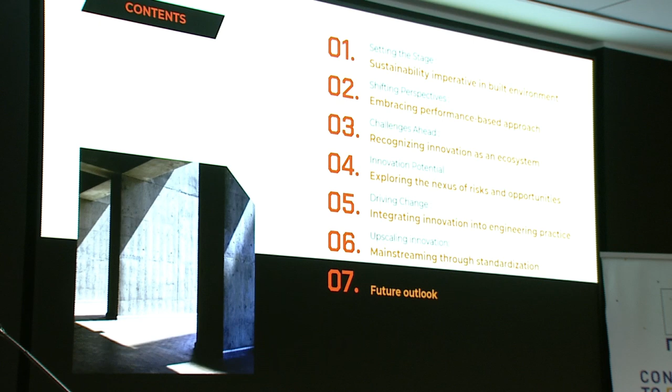I want to tell you something about a number of topics that are a kind of stepping stone in creating solutions. Part of that will be innovation, and a large part of that will be communication—how we talk with each other, do we understand each other, and are we going in the same direction. And in the end, how can we amplify the impact of what we are doing? What is the role of standardization, in particular in mainstreaming and upscaling the things that we are doing, because only by upscaling can we really make a change.

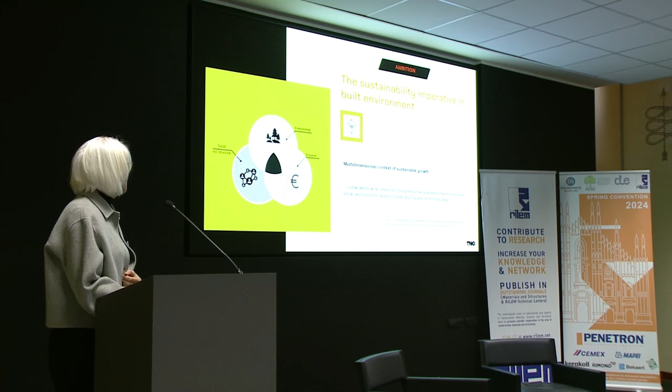Well, sustainability—everybody knows, but let's repeat it once again. It's about sustainable development, about something that we can continue to do over the years to come. It means that we need to look from a broader perspective. The economic perspective is also a very important one. We can have perfect solutions, but if we cannot afford to implement them, it's just impossible to succeed. And there is also this aspect of societal needs.

Societal well-being is more than environmental impact only. There is security, there are needs for aesthetics. There are a lot of things, and built environment is an example where we cannot forget this. So this multidimensionality is important.

And that's why I mentioned it in the beginning already—as Liberato said, International Federation for Structural Concrete represents largely designers and those who will construct and maintain the structures. So for us, it's about taking care of multiple aspects of the requirements, which is compulsory for performing our job.

Well, we have been hearing about sustainability for actually not such a long time—1987 is when it all started. And if I had been preparing this slide 2 days ago, I would need to add one more: 2024. Yesterday, the European Court for Human Rights ruled that having an adequate policy for controlling climate impact is a basic human right. This will change policy, and will probably influence policy worldwide, although it only happened on the European scale. It means the attention is increasing.

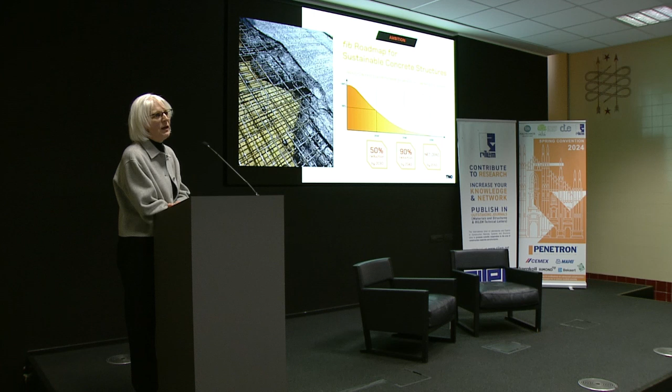2050, it's already in a few years. We don't have time to waste. And that's the reason why a number of organizations and communities establish roadmaps.

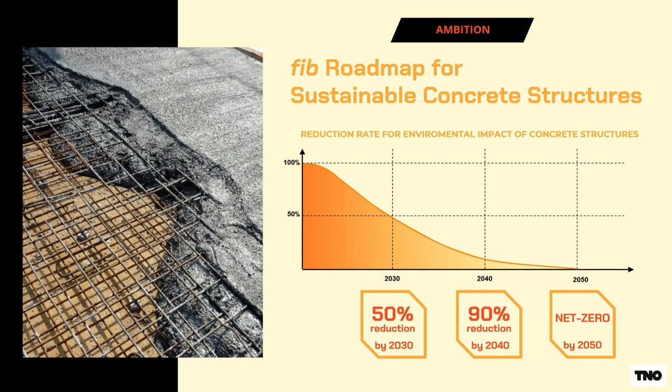This is one of the examples that the International Federation of Structural Concrete have developed: targets for reducing environmental impact in the concrete construction sector. I'm talking about structural concrete. This is just a representation of our ambition: 50% reduction by 2030, 90% reduction, down to 10%, by 2040, and net zero by 2050, total, over the total life cycle.

When you discriminate that into the part attributed to the cycle, part A, which is production and manufacturing, you see that our ambition is much more demanding. By 2040, we should become net zero over the part of the A cycle.

Now, this slide I also want to use for some other purpose. Quite often we think that that's all, stage A. When we do it, then we are done, yes? Then we did good. Well, although this is just a schematization and representation, there are also other stages that generate environmental impact.

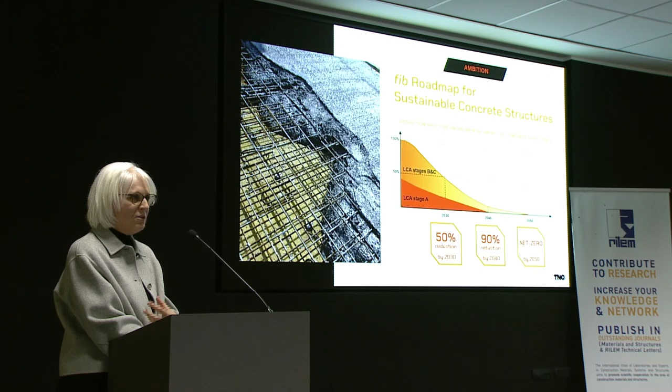This is largely based on the scale of the infrastructure assets, bridges, viaducts, tunnels, in which under environmental impact in stage B and C, we can also count indirect environmental impact due to traffic restrictions and hindrance, and impact caused by the need for rerouting transport, particularly in urban areas. This will be large. For buildings it can be different, but nevertheless there is also that part of the need for improvement that we should not neglect.

Well, is it feasible? Sometimes it's good to really be realistic, yes? We can set great targets but never get there. But who will check that in 2050? I will be retired by then. But this seems really to be realistic. Very simple calculation.

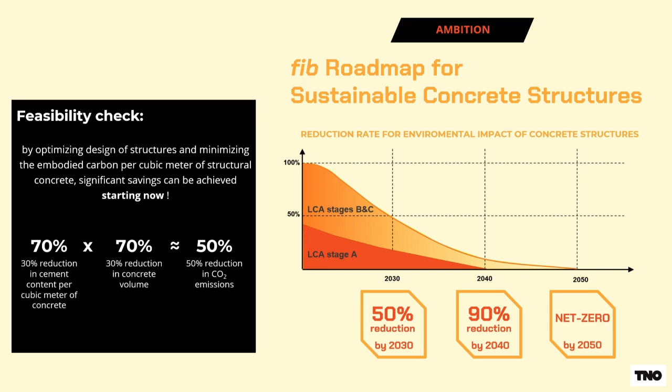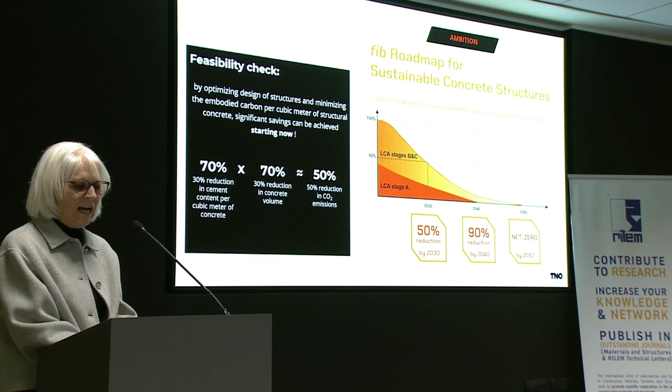What we now do in concrete structures can be improved very fast if we are only able to reduce cement content in a cubic meter of concrete, and we know that cement is one of the factors that very much determines the carbon footprint of concrete, by 30%. And we can optimize our design, which is at this moment, in general, in routine projects, very conservative, and we over-design our structure. Then we can already get to 50% of the CO2 emission. It's really not much.

We are not talking about zero carbon or low carbon concrete to the extreme that many of you are working on. We are just talking about something that we could do. And think about that - a lot of concrete is being used in structures that are actually not very demanding in terms of performance requirements.

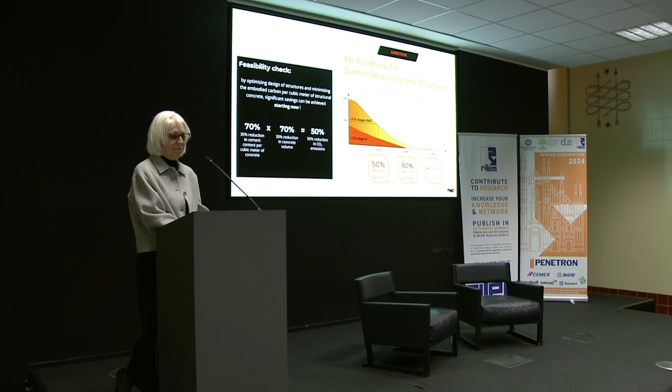So let's work where we can work immediately. Let's try to do that already now and go towards 2030, 2040, 2050 with the large ambitions, because we actually should be able to do it.

Now, what are the tools, what are the means, what are the approaches that structural engineers, with all the partners involved in that project, have at their disposal? We can do a lot, as we already said, in that before-use stage A: material production, material and construction process. Reducing environmental impact there is compulsory, and that's evident.

What we can also do is design and construct to facilitate circular use of the current waste streams. This is also something we can already mobilize in that stage A. So not only carbon neutrality, but also circularity. You have seen these policy targets - circularity is also important, probably just as important as using materials optimally.

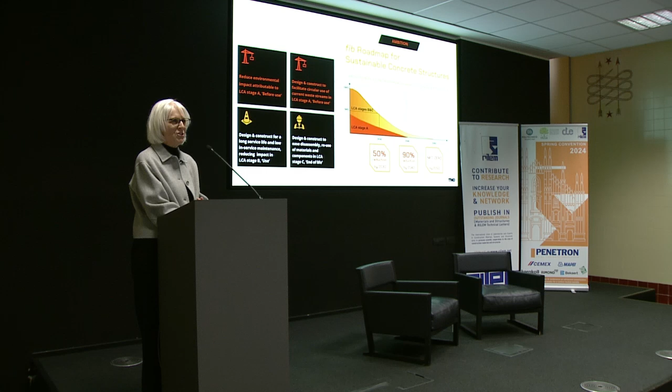In the long run, we don't want to use that. I was last year at a conference in Australia, which opened with a great statement from the native owners of the land saying: use what you need, don't use more. I think it's great. We should use what we need, and we should try to use it in the most optimal way.

Now, going into stage B, the stage of use, we deal with the built environment in which a lot of assets already exist. Of course, it is different throughout the world. In the north, we have actually already constructed a lot of the assets, both buildings and infrastructure. In the south, we are still in this trend of increasing the volume of assets.

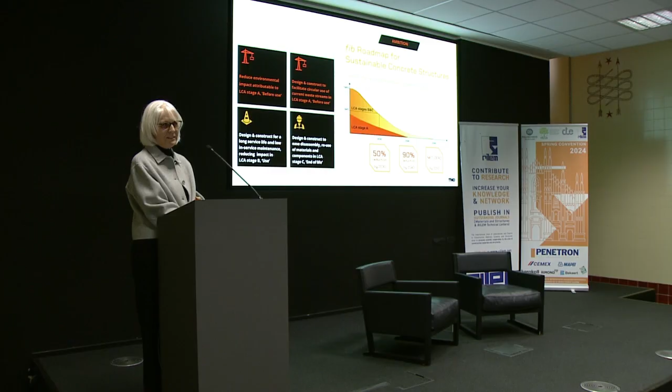So this is not generic, but anyway, there is a huge opportunity in improving the way we use our structures and designing for long service life, designing for low in-service maintenance, significantly reducing the impact of stage B. And we can do it both when we design new structures, but we can also do it in case of existing structures by improving our approaches to conservation and use of the structures.

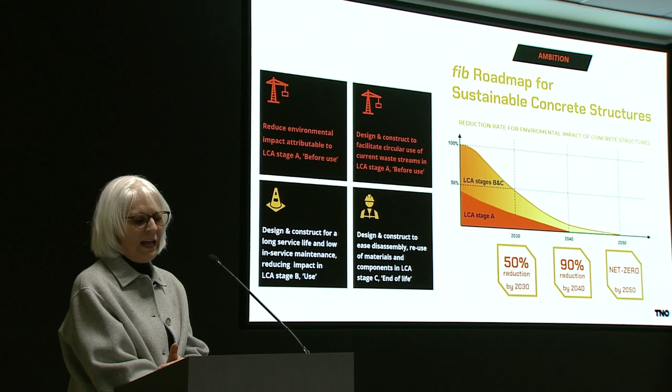And end of life, again, is a stage of which we can think, and we can discriminate it into two situations: design for reuse, and sensible end of life. So how do we build new structures so that we can reuse them, or at least we know what we are going to do at the end of service life?

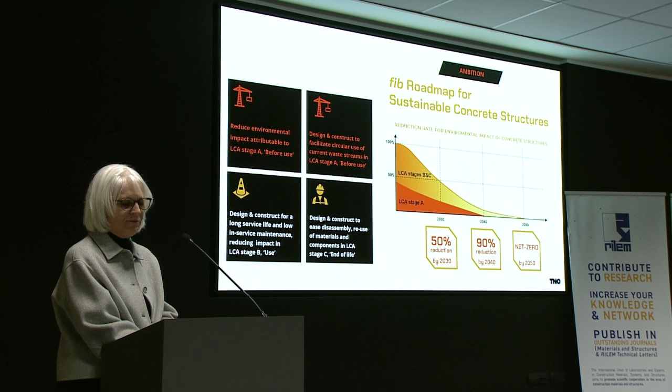Just to go back to your talk, this is thinking ahead. And another situation is, what do we do with the structures that already exist, and how will we think before we decide to decommission this, and what will we do with the materials that come free after the end of life. With that roadmap, fib comes with a few stepping stones for creating the solution.

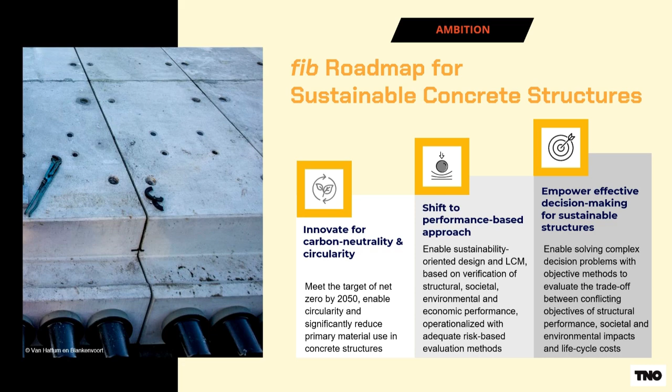The first one, evident, is innovation for carbon neutrality and circularity. We have to have these technologies, yes? I mean, this is compulsory. We cannot keep talking. We have to be able to implement new solutions, because the existing solutions definitely have their limitations. Maybe we will get to this 50%, but we want to get carbon neutral, so we need more.

The second one is to go into performance-based approaches. The current specification-based approaches have such strong limitations that they will not enable designers to work; they constrain them in too many ways. I will soon talk more about what performance-based means, because I think here we need to establish a common language. This is essential to understand as our new way of looking into the objectives of design and evaluation of performance, doing it across all domains of sustainability - structural, societal, environmental, and economic performance - and thinking about the risks involved in our asset structures.

I mean, risk is something that we deal with. It's nothing new. It's not that new solutions have risks - everything has risk, everything that people make has a chance of going wrong. And we know how to handle it. Let's embrace it and evaluate it when we are talking about innovations and improvement.

And now we are in Milan, ahead of the design week, and everybody thinks design is creativity. Well, so is engineering. Engineering is also creativity - it's an art of decision making. So we need to help people take decisions based on good arguments. This is also one very essential part of the holistic view on sustainability.

We are taking decisions that sometimes involve trade-offs, sometimes involve compromising economy versus environment. Sustainability, as I said in the beginning, is being able to endure for years. Resources are limited - human resources are limited, financial resources are limited. How can we upscale without considering these kinds of situations, in which the evaluation will involve trade-offs, or at least will involve discussions about trade-offs, in which we want to be transparent?

Now, as I said just before, performance-based approach is a must. We all complain about the limitations of current standards that are specification-based, that prescribe how to make things, that limit the freedom of material producers, designers, contractors, and in the end deliver something that is not exactly what the owners intended to get.

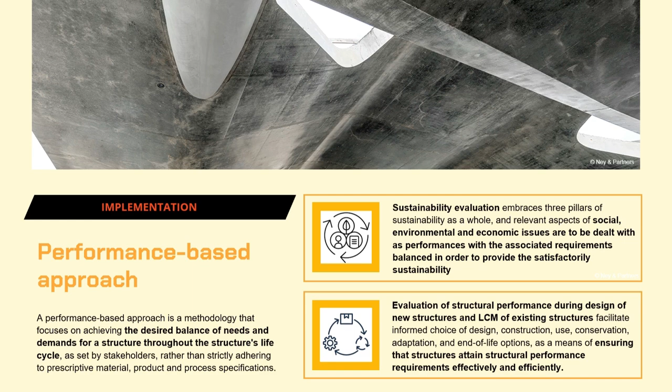Well, why did I mention owners and customers? Because these are the ones who know what they must have. They are the ones who set the demands. They are the ones who can articulate their needs, and we have to understand them. There will be a lot of talking about understanding in this presentation, because this is exactly what I think sometimes goes wrong - we don't really listen to each other. We try to sell our solutions without sometimes understanding whether they fit.

And now these performance-based needs and requirements can be established on the level of people, profit, planet - so overall sustainability - but also in particular on the level of structural performance. And since this is close to my background, probably a part of this talk will be about that structural performance and evaluation.

What do we do when we actually look at the process of creating building assets in general and concrete assets in particular? When we really want to apply a performance-based approach, we need to start from the beginning, from recognizing who are actually the players and what kind of role they play in that system.

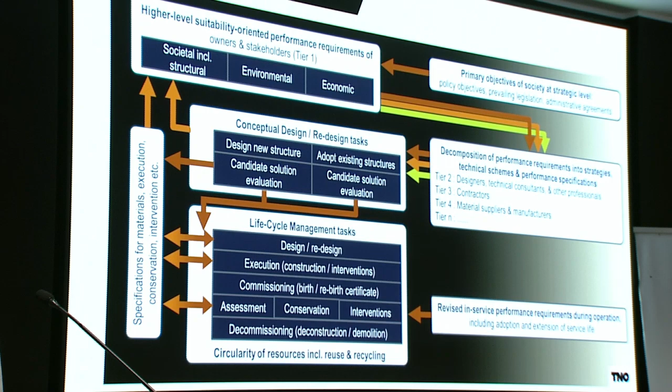The first layer of these requirements comes from policies, from legislation. There are demands that society has already decided - we accept certain levels of human safety, so we accept certain risks. We demand certain levels of operational safety for our assets. Quite often they are set by law - we cannot neglect them, we must know them, we must understand that. A lot of what is put in the Eurocodes is already performance-based.

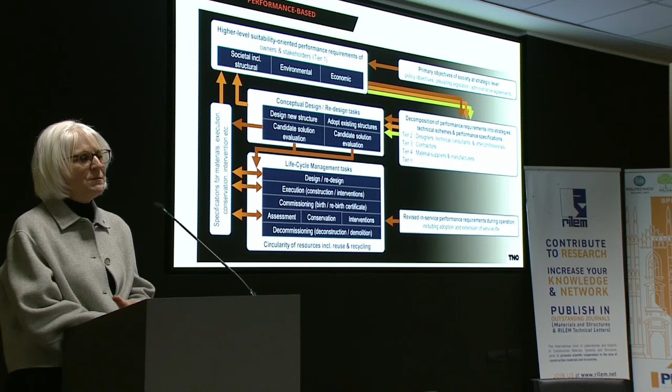These high-level performance requirements need to be decomposed and translated into requirements that are actually technical and relevant for the process of design and engineering. There is, in that scheme, one very important stage - the conceptual design stage, or redesign stage in case of existing structures. This is where the whole process starts, the beginning of the whole creativity.

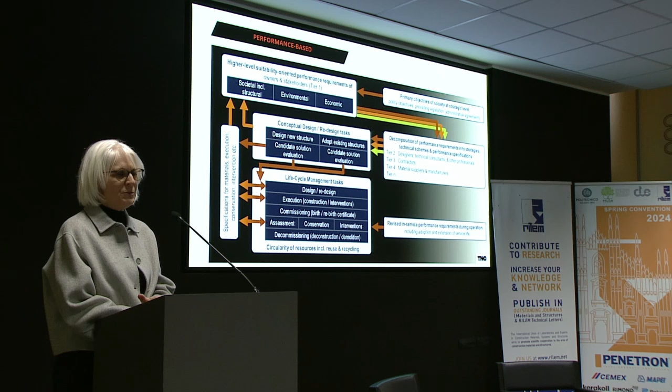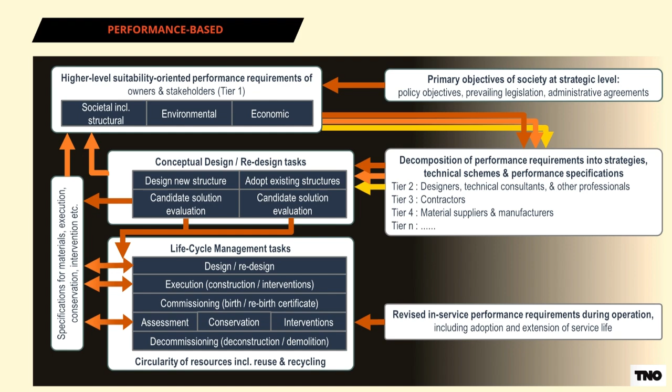This is the moment in which it's so important to engage, especially when we talk about innovation, with the players who may have their opinions, their solutions, their ways of handling things. Designers, contractors, material suppliers and others - all of them can and should participate in the decomposition of these performance requirements, to create the full set of requirements that we can then evaluate, validate, improve, and so on.

Well, what does it mean? Innovation thrives on effective communication. If we forget that step, then we will start again to specify, because this will be this directive way of communication - please provide me with the material, here you have material with the strength, do something with it, now here you have a structure, deal with it. That's not the way we can communicate with each other.

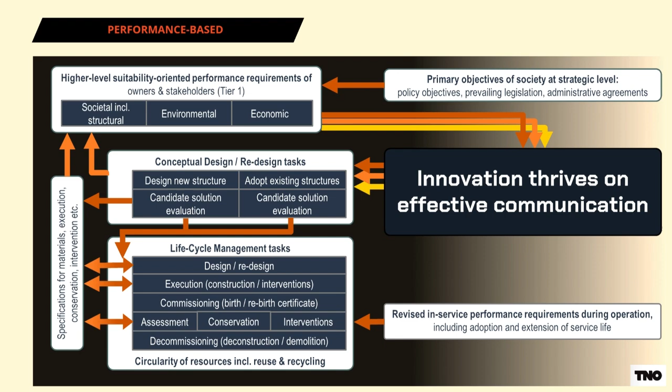So that's a very important part of performance-based design - communicate when you establish your requirements, because this will become the basis for everything that happens later on. The conceptual design stage is the moment when you do it. And for existing structures, this is the stage in which we conceptualize the beginning of our assessment and the beginning of taking a structure into life cycle management process.

And of course, requirements can be revised during the service life, so it's also important to stay flexible and stay alert, because things change in time and we should not forget that.

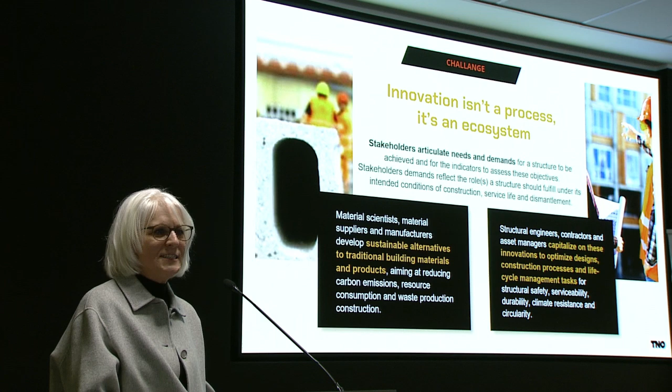Which brings me to one of the important statements. When I was thinking about this keynote, I was thinking, what actually do I want to say? And I think this is probably the most important: innovation is not a process - it's an ecosystem. You need to innovate together, and only then can you succeed in making your innovation relevant, because then there is something who wants to receive it, there is something who wants to provide it, there is somebody who wants to make it.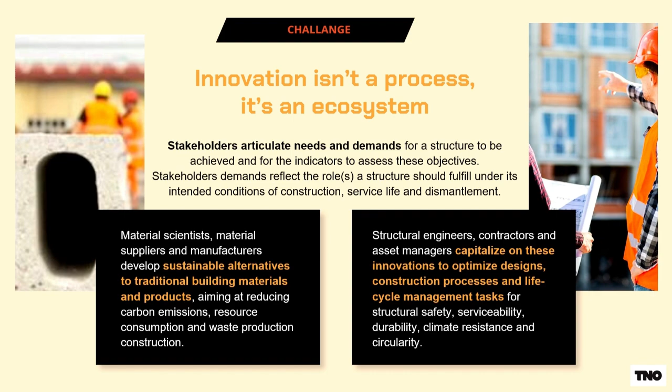So as you see, while we are sitting here together, people from the material angle, people from the structural angle, we need to understand that we can only use these sustainable alternatives and capitalize on them if we understand what we actually need. Now this will be a kind of attempt to establish a common language. Maybe it's too technical for the keynote, but nevertheless, I thought I need it.

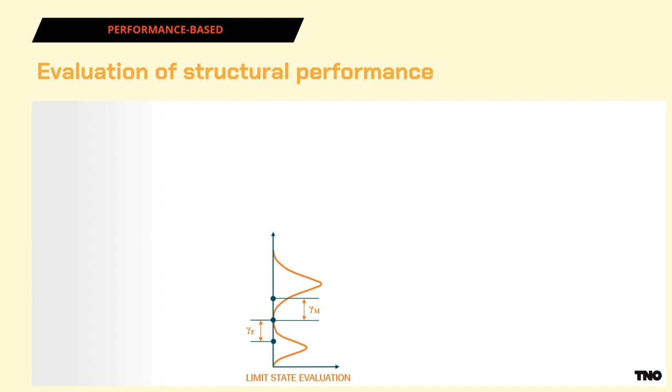What do we do - and this is more generic than concrete structures only, this can be generalized beyond the limit state evaluation and limit state design concepts. What we actually want to prove by evaluating structural performance is that our resistance is larger than our demands on the resistance. That can be mechanical resistance, durability, or any other type of performance.

I come from that part because many of you do research on material. What do we do? We try to understand how that resistance part is being established, and we simulate what reality is. We use models - they can be models based on empirics, but we just model reality. What we have here are models of materials, and models of materials provide a distribution of their properties, but they are bound with certain uncertainty.

These are just models, schematizations, and then we use that as an input in resistance models, because we are talking about structures, so it's not the material that is providing the full resistance. No, materials contribute to provide the resistance of the structural system. So again, we use another type of model to which the material model is an input to establish or approximate the resistance of our system.

And the structural resistance models, again, have their uncertainty. And all these uncertainties together, I think, contribute to having this gamma m, this partial factor for material. So it's not only material. There is also this model uncertainty on structural resistance. And so uncertainty of material model, uncertainty of resistance model, we need to know them.

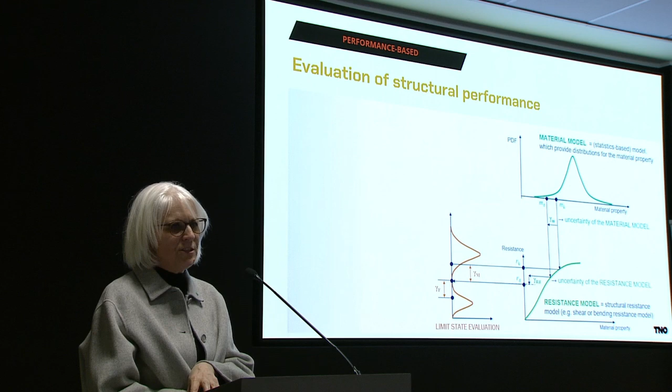Once we know them, then we can work with it. That's also the beauty of modeling. Yes, it's so transparent. We only need to have that understanding and this information to be able to proceed. It becomes important when things start to change, because this is nothing new. I mean, this is what we already do for normal traditional solutions.

But when we go into new materials, then maybe uncertainty of the material model changes. Maybe the model changes, actually. And the same goes with the resistance models. Are we sure that the same resistance model that we have been using for traditional concrete is still valid for the new type of material, where maybe new mechanisms start to play a role, maybe fracture mechanics becomes different, maybe interaction between reinforcement and steel reinforcing material and concrete is different, maybe ductility is different and starts to play a role. So how good are our models?

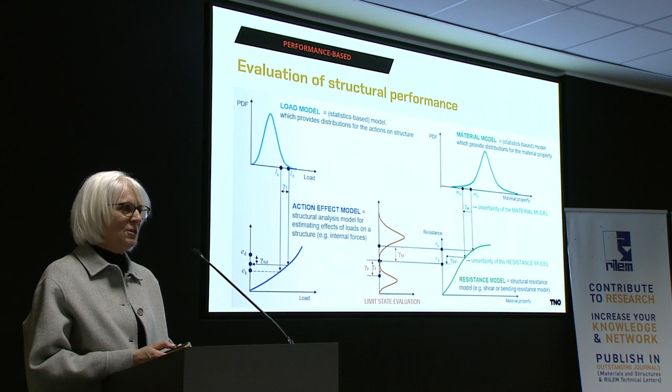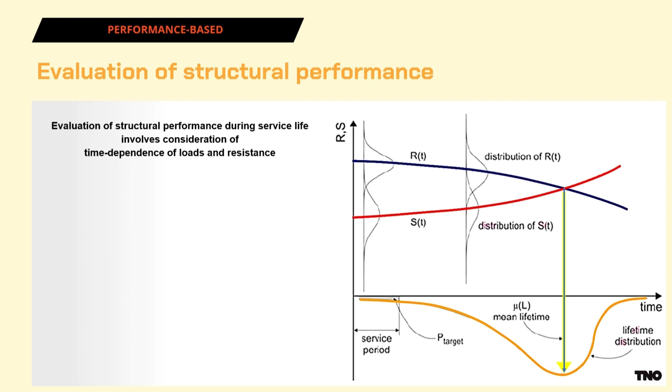Well, actually the same happens on the side of the loads. Less relevant? I don't really know, because when we do design, we have to anticipate the change in the loads over the life cycle. We don't design for today, we design for the period over which we want to provide that performance. So service period is important, which means that we have to understand how the properties of our resistance will start to change, how the resistance will decrease or increase in time.

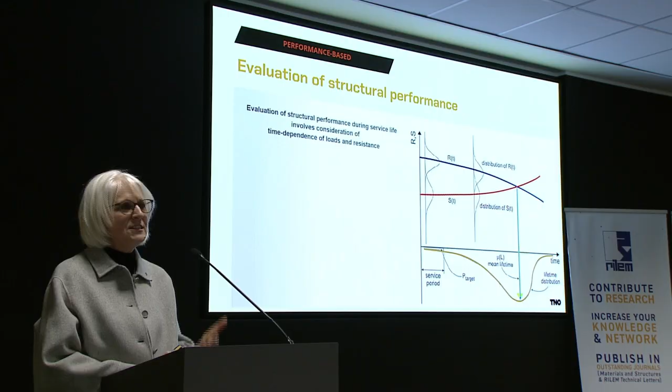And the same goes for loads. Well, that's in a few slides, I will need to go back here because this time-dependent phenomena can be different with the new solutions. And if we don't know what it is, then we again amplify the risks of implementing this kind of solution. And it would be very difficult for customers and owners to accept this kind of increased uncertainty. Probably not correct English, but it's just huge.

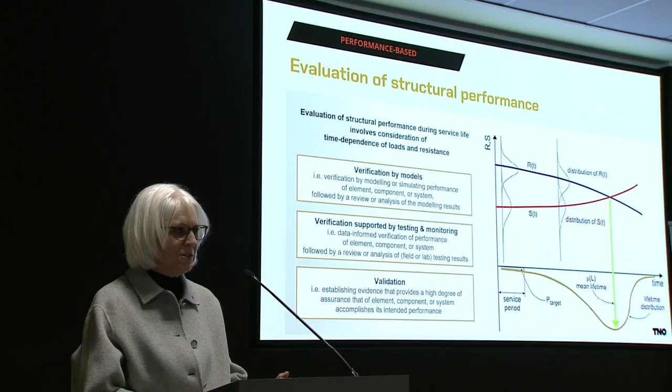What do we do? How do we proceed with the process of evaluation of structural performance? Traditionally, we do verification by models. This is the models that we found in codes, national codes, Euro codes, all over the world. Well, we can support verification with testing and monitoring.

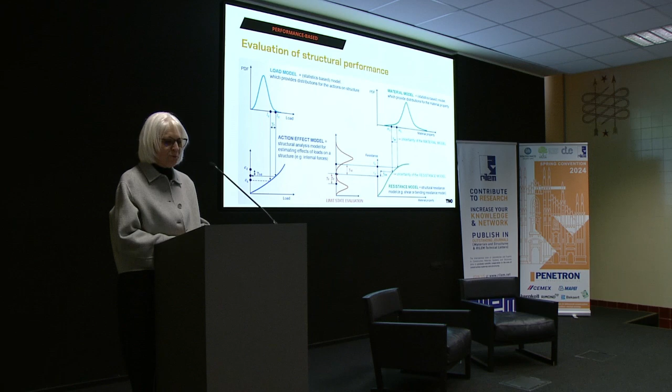Testing on the material scale to provide input to the material models, yes, these models. So we can test to improve our material models. We can test to quantify uncertainty of the material models, and the same, we can improve resistance models, and we can quantify uncertainty of the resistance models. This is all the kind of information and benefit we can get from the testing or from monitoring for the different processes. And of course, we can also go with validation.

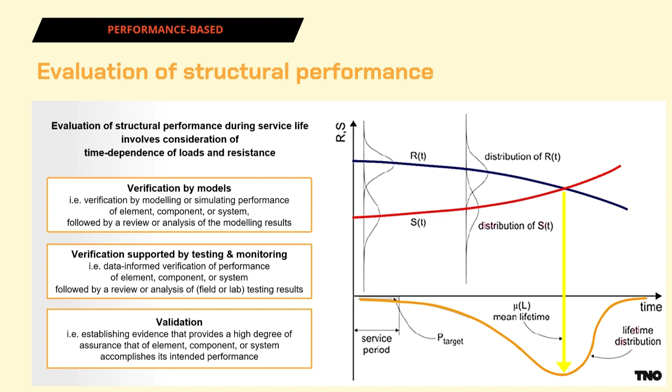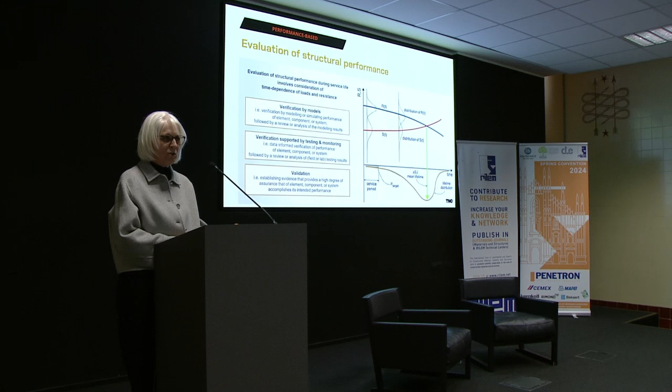This is an approach when we will try to establish evidences of the performance. That's actually, again, classic. You will find it in Model Code 2020 as a concept. Now, how can we really implement it in practice? Here I will try to show for only a few aspects of the design, this needs research and needs getting more knowledge. When we talk about structural safety and serviceability, then we have to understand where we stand and where we want to get, and what are the limitations of the position in which we are now.

Well, what we do when we look at our current models, then we know that they have been established under certain assumptions. And the formulas of the models do not always reveal the background of these models. Yes, we have been spoiled by the fact that everything could be related to the concrete compressive strength. By that, when you look at the model, it seems everything depends on concrete compressive strength.

No, that's not true—that's only how we put it in written form. So to understand these hidden dependencies as the beginning of establishing, of evaluating adequacy of the models for the other solutions. And I'm now talking in particular about other alternative solutions for concrete. There are also other things that are a bit implicit.

We do assume that there is sufficient ductility in the behavior of our systems. Ductility is a compulsory condition for being able to use models. Strut-and-tie type models, you cannot use them if you don't have enough ductility. And we do use them—engineers constantly use them because they are very illustrative, they are nice.

So do we want to verify explicitly if we meet these assumptions? Or do we have to say certain models cannot be used unless you do verify it? How to handle that? There are also other mechanisms that are not accounted for by the resistance models and current formulas for the resistance models. So this understanding is also very important.

And this is a kind of illustration of that process. When we talk about shear, a classic, it's not only what you see in that figure. It's not only that failure. It's aggregate interlock, it's dowel action, it's fracture of concrete. There are a lot of mechanisms involved, and if we really want to improve that part of structural design, we need to understand how they develop in combination with new materials and alternatives.

And this brings us back to this multi-scale character of the process. Here you can see an investigation, DIC again, that shows distribution of stresses. You can investigate how the fracture of the material, concrete, is developing, if there is any difference, and we could have seen the aggregate interlock experiments here as an alternative for this one.

We have also already been able to look at the anchorage between reinforcing bars and concrete in particular. This is a mechanism that is very important for development of force transfer between reinforcement and concrete. So Model Code 2020 provides a way for validation if the current models can still be used for alternative concretes, but actually we want to understand. So this kind of experiment, like this one here, when we test bond under certain conditions, provides us additional information.

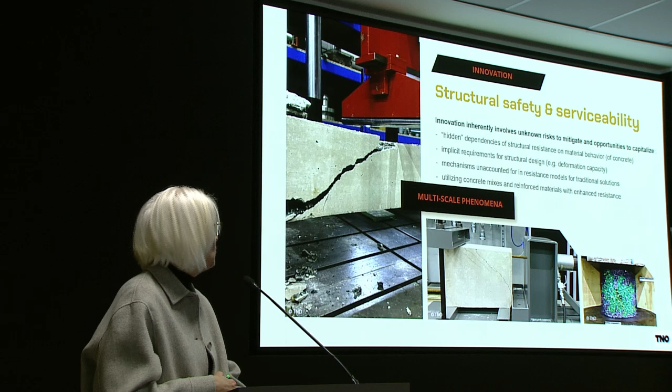And then, of course, we want to understand structural behavior. Now, with structural behavior, there is a thing: experiments are very expensive, and when we don't have results of the full-scale experiments, we may run into problems, because a lot of phenomena are size dependent.

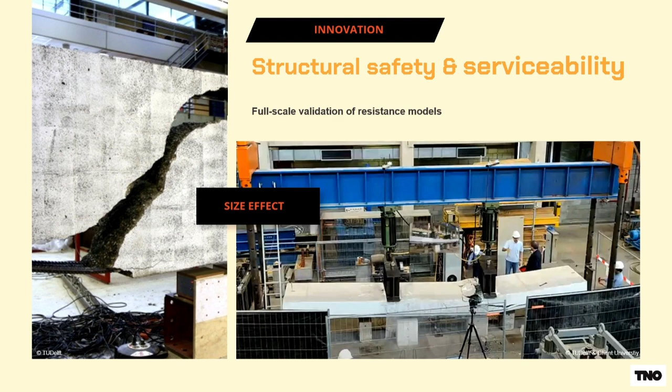This here shows the results of the large-scale testing at the University of Ghent with geopolymer concrete, compared to the previously shown laboratory testing of the similar materials. To understand the effect of size on material behavior and structural behavior is compulsory, because a lot of our structures are large—usually much larger than laboratory specimens. So how do we capture that effect in our models? We have to know, otherwise we get additional uncertainty, increased risks, and we want to understand our risks.

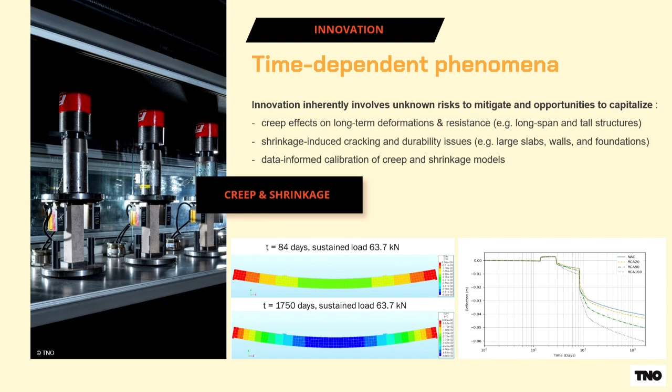Time behavior, time-dependent phenomena, they play a role on different levels—this is creep and shrinkage. We know by experience that a lot of new materials have creep and shrinkage properties that are different from traditional concrete. There have been investigations that show that the creep process does not stabilize, that even after a few years we still have progressive deformations in certain types of materials.

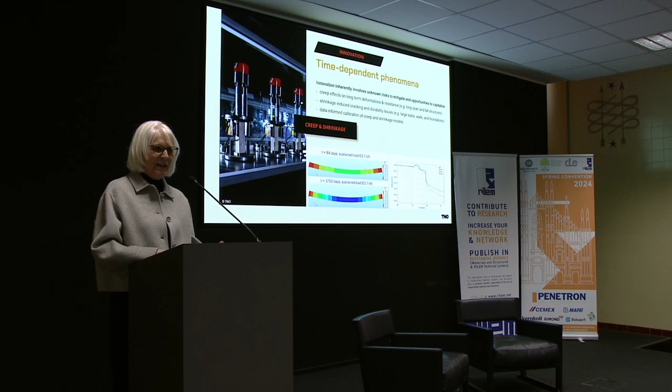It should not actually be a problem to deal with it if we knew. The problem is if we assume that it's not the case. Then in our design, we can run into problems with pre-stressed structures with larger pre-stress losses than what we have accounted for. We can run into problems with deformations and cracking if we underestimate forces when designing our minimum reinforcement. So there are a lot of things that designers can deal with if they have that information.

And here you see an example of simulations for recycled aggregate concrete, in which the creep effects are also different from normal concrete. For instance, in Model Code 2020, we have provided models for how to deal with this kind of change in behavior up to a certain level of replacement of the aggregate. Of course, if we want to go higher than 25–30%, if we want to go for 100% replacement, then we would need better models that can relate that process to the quality of the aggregates and to the replacement ratio.

So a lot of work to be done. Well, again, time-dependent phenomena, but then in the domain of degradation. One very important aspect is the long-term stability of material properties.

I will not go back into the slides, but you hopefully still remember when resistance goes down in time and eventually loads go up, and we have to understand how fast. Here I'm not talking about corrosion of reinforcement, I'm talking about stability of the material properties of concrete on which we rely in our structural design: strength, elasticity, all these things that are the basic input parameters to understand structural behavior.

Effect of different phenomena for new materials can be different. And again, it is not a problem as long as we know, because then we don't need to use them at certain exposure classes. Designers have a lot of tools to play with. You can choose the proper material for the proper situation, and the optimal material, I should say, for a specific situation.

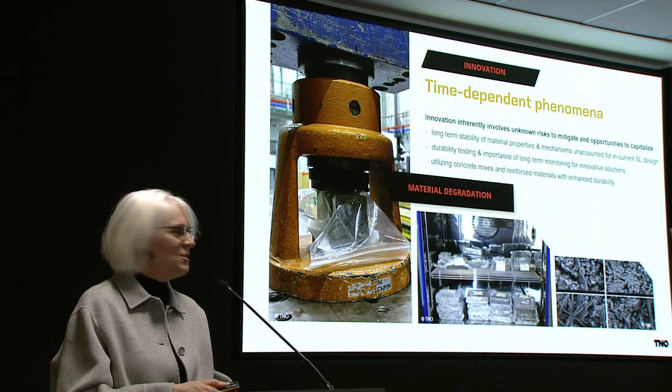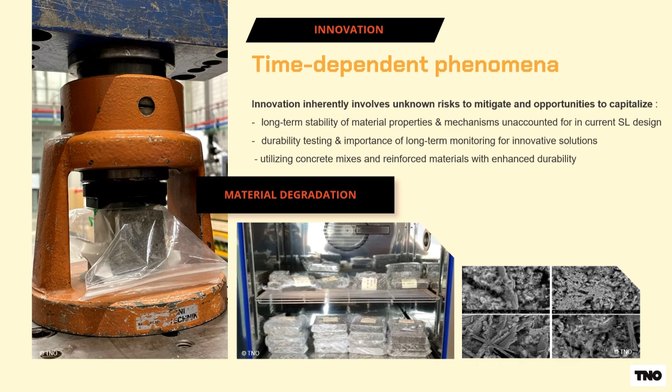Carbonation, an example here, which is different depending on the combination of the materials in the concrete matrix. Here's an example of testing under sulfate attack. Particular situations, but again, structural designers must rely on the input provided by the material scientists to be able to trust that the characteristics of material properties they are using in the structural evaluations are correct.

And in the context of this durability, I just want to mention one thing. We are more and more talking about circularity. So we are thinking about how long can we use our materials, and multiple use of elements in multiple life cycles is already a reality.

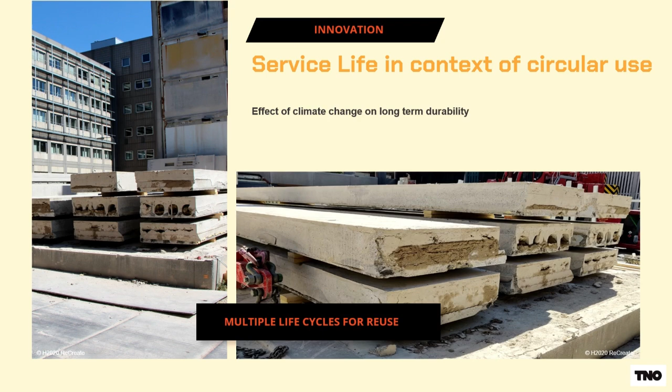In a lot of situations, and here are examples from a project in the Netherlands in which we decompose a decommissioned building in order to reuse structural elements, horizontal slabs, walls, staircases in new building systems. This is what we are doing with existing structures. Well, this was done with traditional concrete, but we also need to be able to do that in the future.

And what does climate change mean for that? Do we actually know what is the effect of increased humidity and temperature on the use of these elements? And what if they come from a carbonated environment and will be used outside? The same goes for new materials.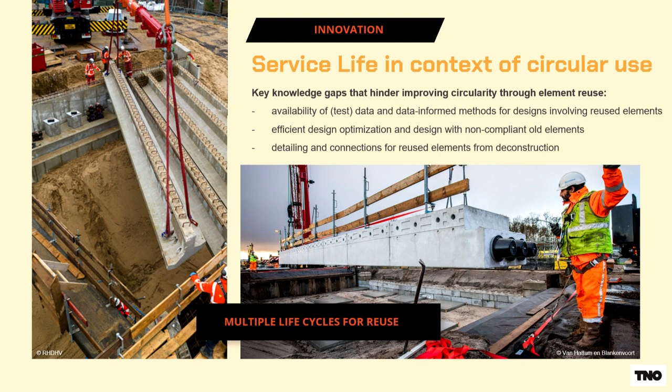More and more new structures will be built for reuse, and service life design in the context of this circular use is a thing. But again, two examples from Dutch practice. The one here is a new bridge which is being constructed, this highway bridge, full-scale, which is being constructed using bridge girders that have been taken from a decommissioned viaduct. So they are already 60 years old, and we want to use them for the next 100.

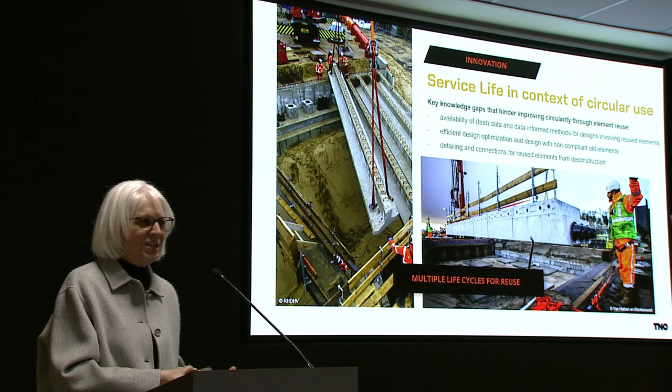Well, this one is another example. This is a bridge system that has been built for circular use, a new concrete intended to be used in multiple life cycles. The design of these elements is done for 200 years. Well, this was still traditional high-performance concrete. But can we do it also with low-carbon concrete? And how can we circularly use our low-carbon concrete solution in the context maybe of also climate change?

Now, a few examples, and Liberato, I don't know how much time do I have? Okay. This will be very few highlights, only very few practices.

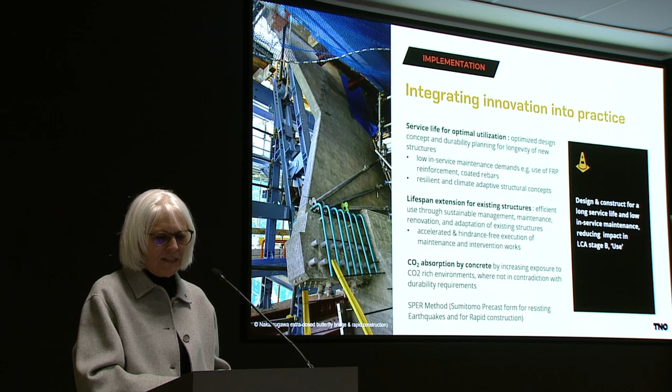Integration of innovation in practice. To some extent, repetition of what you all know, but I only want to have your attention for these examples here, probably.

What we have been using in stage A, we already know about, but these are innovations relevant for stage B, low maintenance structures. This is an example from Japan, where fiber reinforced polymer reinforcement has been used in order to eliminate certain degradation risks, but also a rapid construction method has been implemented to reduce, during the construction stage, the burdens of traffic restrictions. So a lot of things can be combined with each other.

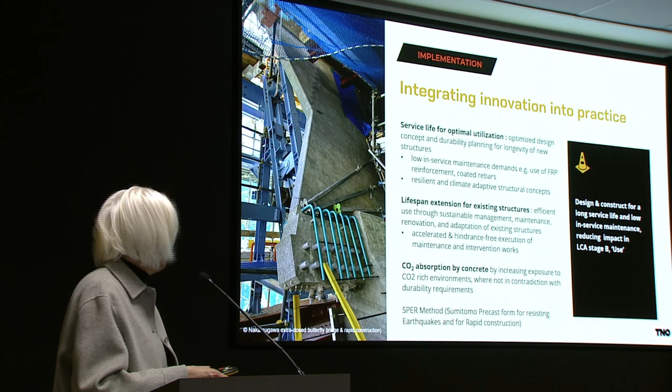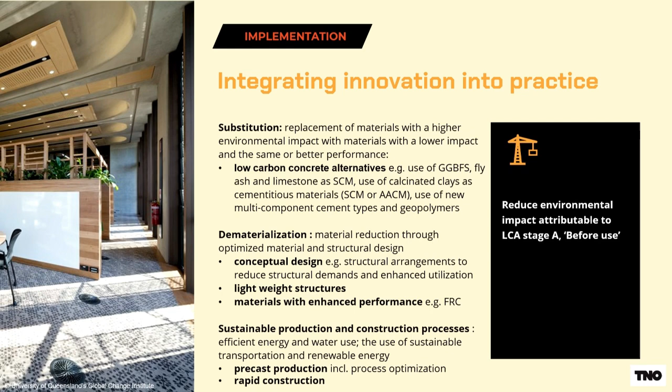But there are a lot of different things to be done. Low-carbon concrete alternatives are one path to go, no time to describe which could that be, but also lightweight structures are a way to go. Lightweight structures have an additional benefit in that they limit the volume of material that needs to be transported. If we go with precast structures, we need to transport from the precast factory to the construction site, and the energy consumption is somehow related to the mass we need to transport. So a lot of these benefits start to amplify and combine. Again, rapid construction is one of the ways to go.

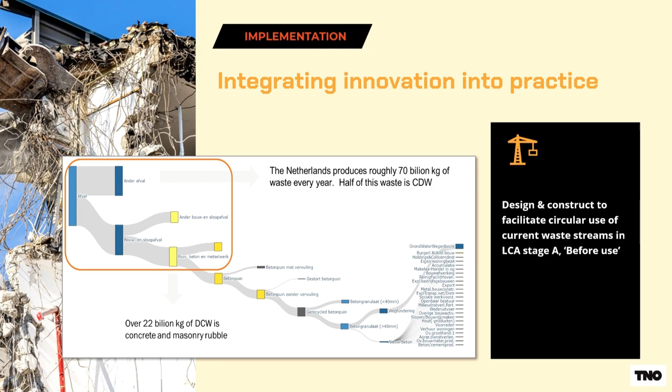Circularity—again, we do not use the materials that we have. The example from Dutch practice shows that a very small percentage of our construction and demolition waste is actually upcycled. A lot goes into foundations. Well, of course we need foundations for roads, but maybe we can use lower quality materials for that, and use a larger part of these materials for our assets.

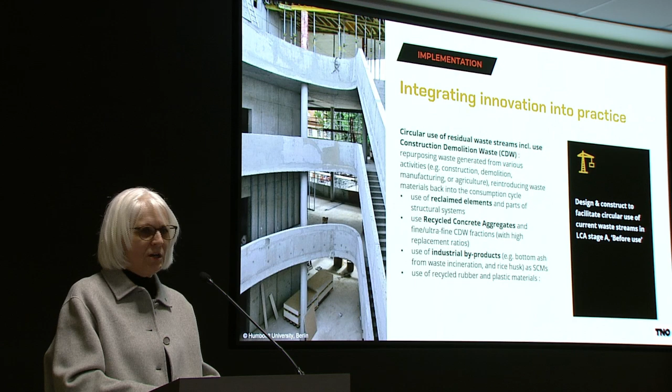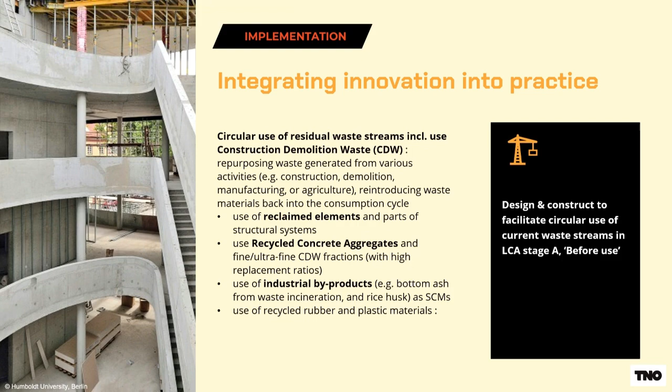This example, Humboldt University Berlin, used recycled aggregate concrete for the structure successfully and without issues, but also thinking about reuse of fine fractions, ultra-fine fractions—this is a way to mobilize these streams.

Designed for deconstruction—here probably something quite straightforward. We can work with design for disassembly. What we are now trying to recycle from existing structures are usually monolithic connections, very difficult to deconstruct and very difficult to assemble again in a new structure. But if we think ahead, knowing that the service life of many buildings is 50 years nowadays, and many bridges 60 to 70 years because of functional requirements, then this can really make sense—how do we construct and how do we also handle the risks.

Well, last 3 minutes—give me 4. Because when we want to increase impact, we need to take the next step. Yes, research, best practices, pilots—that's not enough yet.

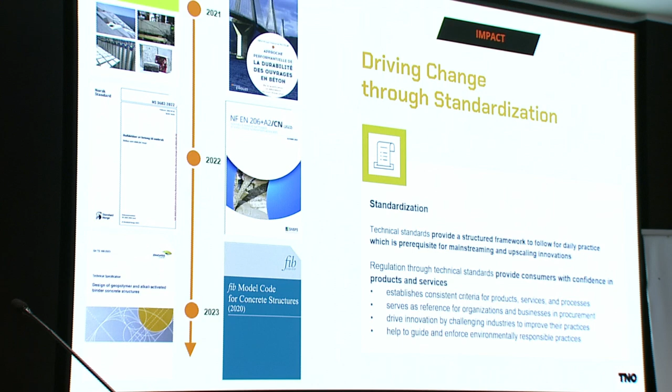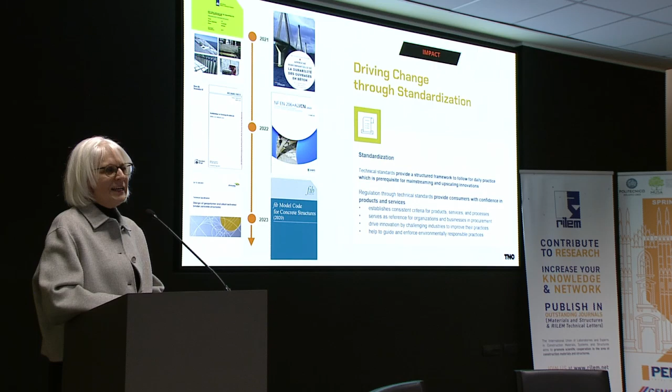There is a lot of work being done, and here is just a piece of all that's available, collected over the last 2 to 3 years—just an inspiration, impossible to show you all. There are more and more guidelines and standards being developed in which we try to provide support for daily practice, done for different situations.

The one above is the Dutch standard that enables use of the equivalent performance concept to validate new concrete compositions for structural use. This one is the Norwegian standard for use of hollow core slabs. Here you have the first design standard for geopolymer and alkali-activated binders for structural application, the Australian standard. The fib Model Code provides provisions for recycled aggregate concrete, fiber reinforced concrete, and some first provisions for assessing material properties, and the French standard also for equivalent performance.

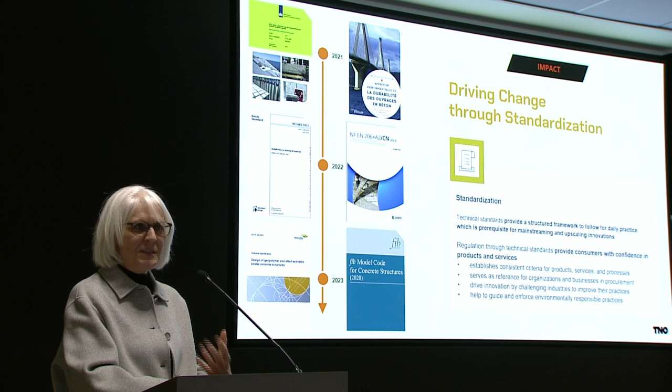A lot of things are happening, and it means that it can be done. We can actually establish specific provisions for designers to support them in their daily practice.

Now, to summarize, I'll illustrate with an example that for me is one of the nicest, combining everything. What may look like very modern architecture is actually the refurbishing of a very old and regular high-rise building in Sydney. In that case, everything has been recycled, and whatever was added was optimized from the point of carbon neutrality.

The core of the building is reused. The slabs cast to achieve that architectural design were made with recycled aggregate, which was actually the product of the demolition of the parts of the structure that became obsolete. And it's beautiful—in the end, it's beautiful.

But it took a lot of effort. There has been a willingness from the owners to accept this project. They took risks because it was highly innovative, and they communicated apparently well enough to have the courage to take these risks. So that communication between the contractor, the designer, the manufacturer of the products used, and the owner was the key to success.

So we can make that next step, provided we do understand each other, and we know that we always deal with risk, whether it's innovation or not, and that we can do it because we trust in our knowledge. And I think that will be the closing of my presentation.